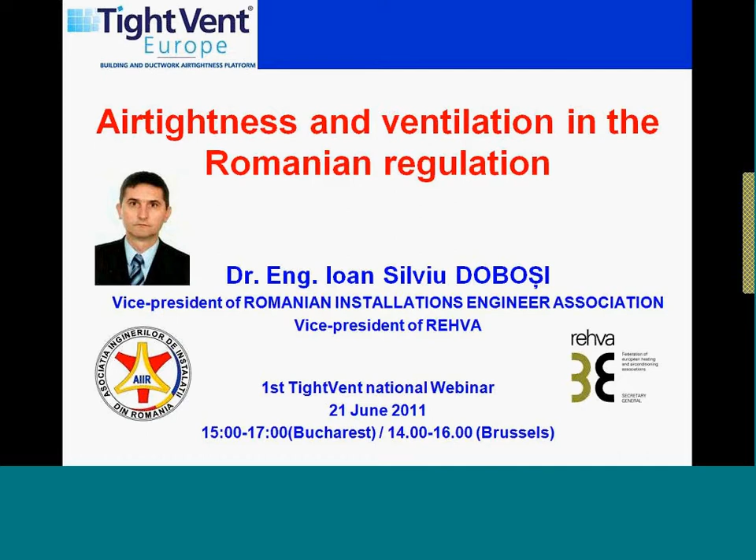Okay, let's go to our topics. My presentation is divided into 4 chapters. First, I want to introduce the European legislation and Romanian legislation, and some ideas which we have in the Romanian legislation and regulation regarding building tightness and ventilation tightness. After that, the step in which we are for the moment to attain the goal of nearly zero energy building in Romania.

The main European legislation which we have is the Energy Performance of Building Directive from 2002, and the recast EPBD from 2010, and of course the EN EPBD standards.

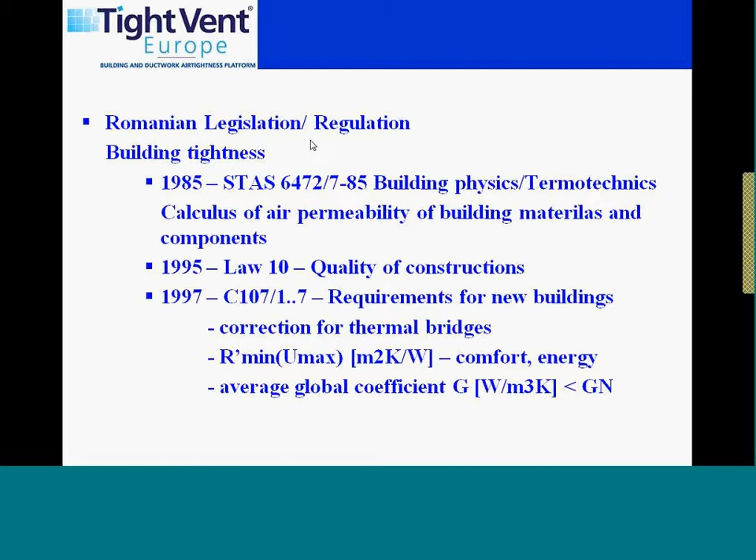Regarding Romanian legislation and regulation in building tightness, we have standard 6472 from 1985, building physics, thermotechnics, calculus of air permeability of building materials and components. Law number 10 from 1995, quality of construction. C107 from 1997, requirements for new buildings. In 2005, Law 372, EPBD transposition, and from 1st of January 2007 we have a new methodology.

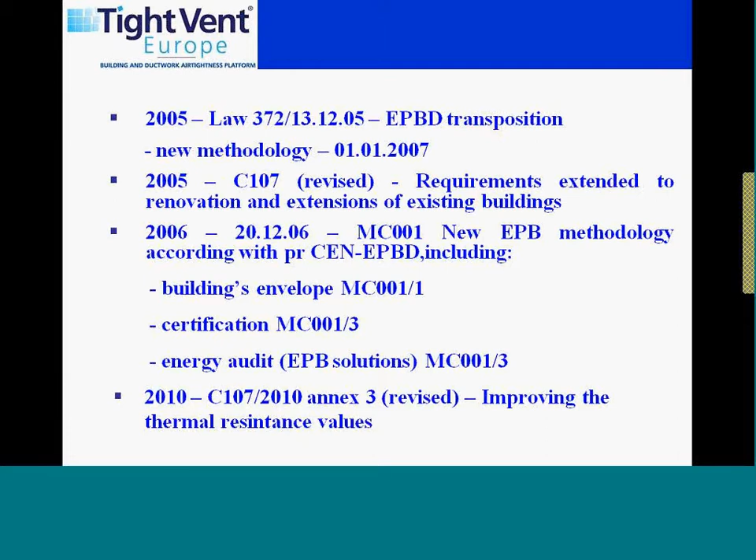The new EPBD methodology according with the EN EPBD standards, including the building envelope, the certification, and the energy audit. In 2010, the C107 was revised and it was improving the thermal resistance value.

Regarding the tightness of ventilation systems, the methodology is the new methodology according with the EN EPBD, including the building services, the MC001/2, certification and energy audit.

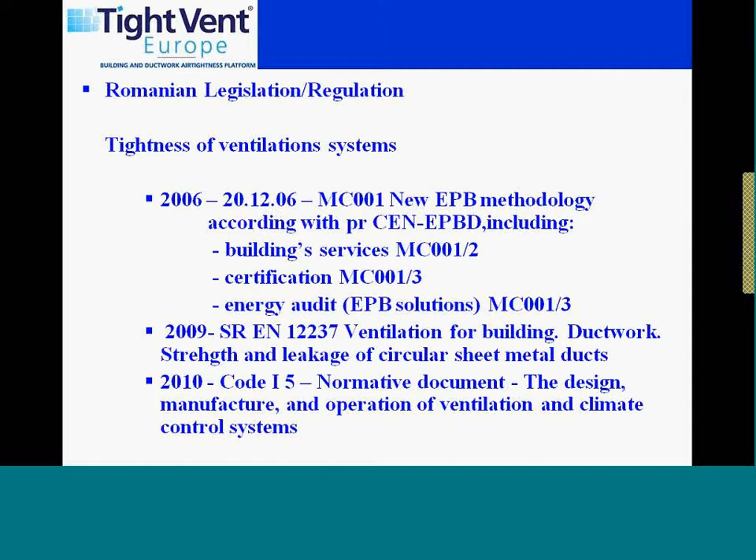In the European standards which became Romanian standards also, we have EN 12237 ventilation for buildings, ductwork strength and leakage of circular sheet metal ducts. From 2010, we have a new code in ventilation, code I5, a normative document titled the Design, Manufacture and Operation of Ventilation and Climate Control Systems.

Building tightness is mentioned in Article 4 of Law 372, the EPBD transposition, and in the methodology. There we find thermotechnical characteristics of the elements that make up the building envelope, interior partitions, and including airtightness.

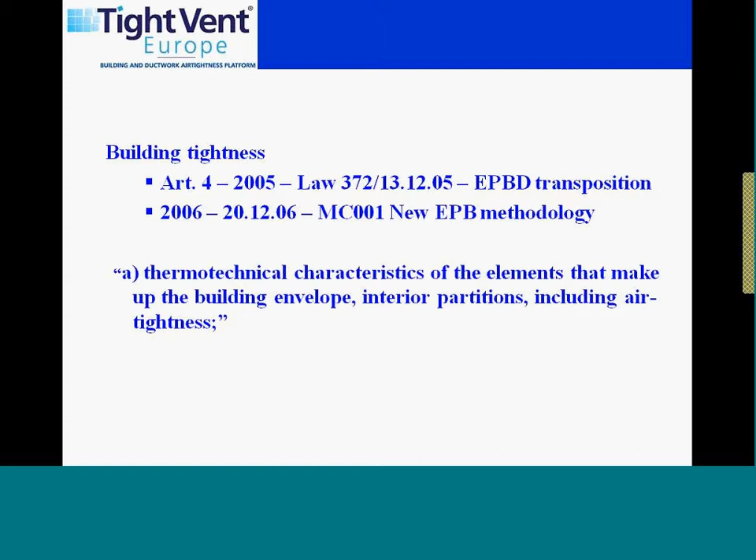The envelope and airflow: the flow of air through the envelope can be a source of heat loss. Because warm air can contain large amounts of water vapor, airflow is also the main means through which moisture passes through the building envelope. In winter conditions, air is forced to pass through the building envelope; air coming out carries heat and humidity, and incoming air which is dry creates uncomfortable currents.

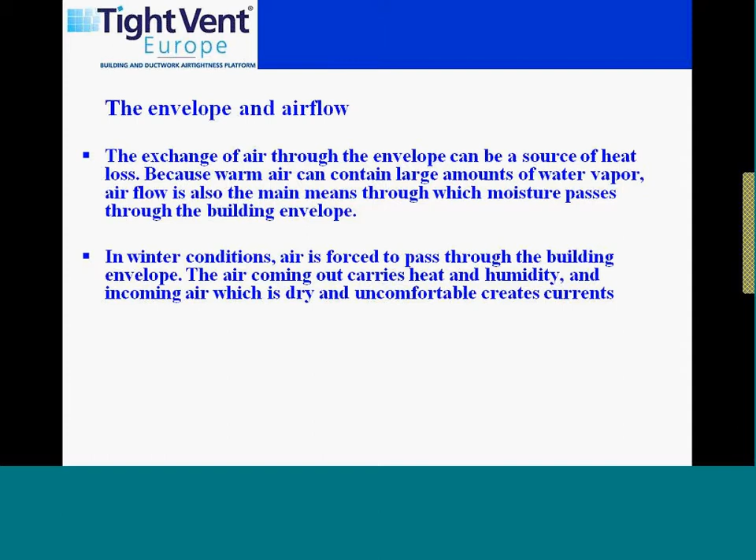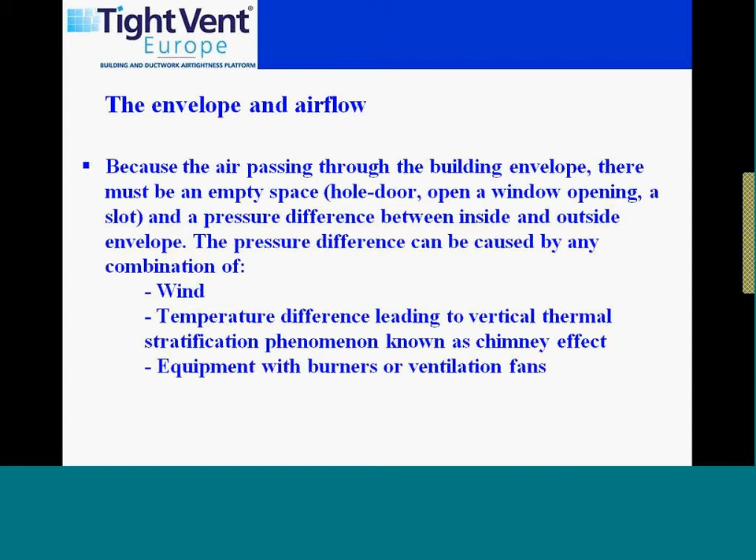Before passing through the building envelope, there must be a pressure difference between inside and outside. This pressure difference can be caused by a combination of wind, temperature difference leading to vertical thermal stratification known as the chimney effect, and equipment with burners and ventilation fans.

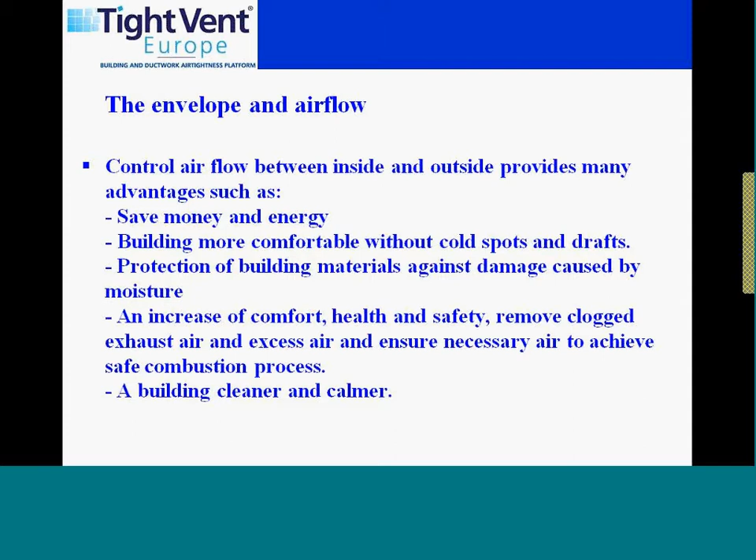Controlled airflow between inside and outside provides many advantages such as saving money and energy, making buildings more comfortable without cold spots and drafts, protecting building materials against damage caused by moisture, increasing comfort, health and safety, removing clogged exhaust air and excess air, ensuring necessary air to achieve a safe combustion process, and a cleaner, calmer building.

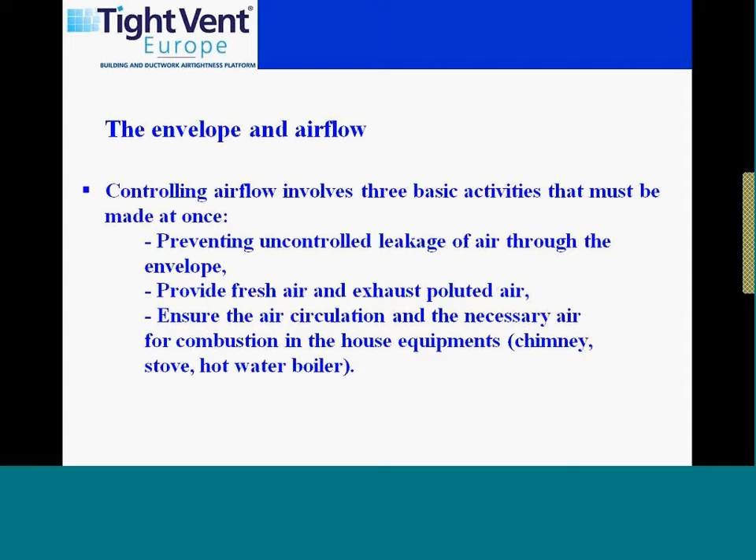Controlling airflow involves three basic activities that must be done at once: preventing uncontrolled leakage of air through the envelope, providing fresh air and exhausting polluted air, and ensuring air circulation and necessary air for combustion in the house equipment.

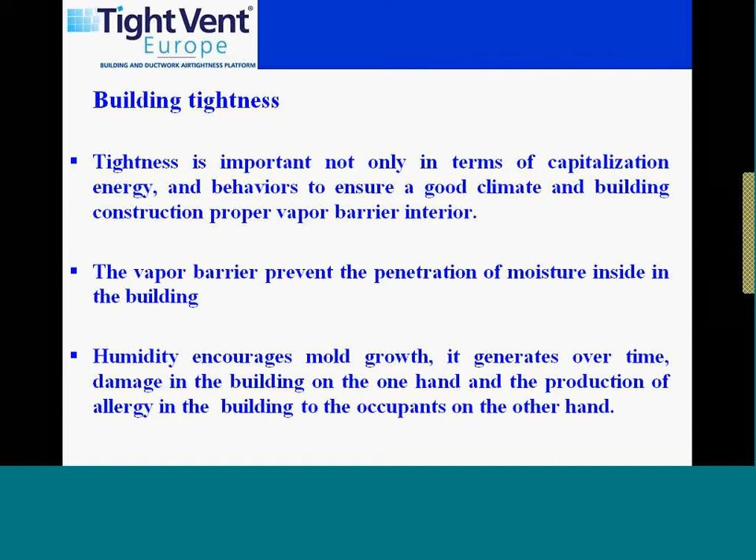Building tightness is important not only in terms of energy, but also to ensure a good climate and building construction with a proper interior vapor barrier. The barrier prevents the penetration of moisture inside the building. Humidity encourages mold growth, which generates damage in the building over time on one hand, and causes allergies for the occupants on the other hand.

What is important is to not forget that a completely tight building is unhealthy, even dangerous.

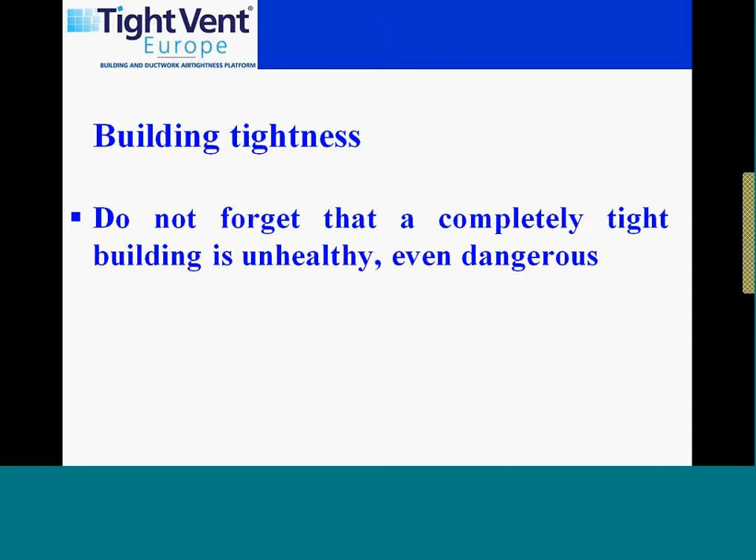Tightness ventilation systems, according with the normative document Code I-5, we have a table with the air tightness requirement for air pipes, which shows the maximum admissible for four classes of air tightness.

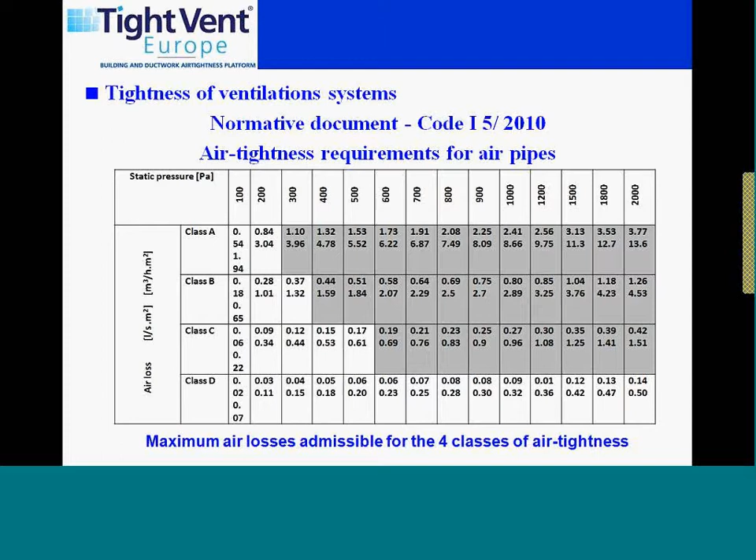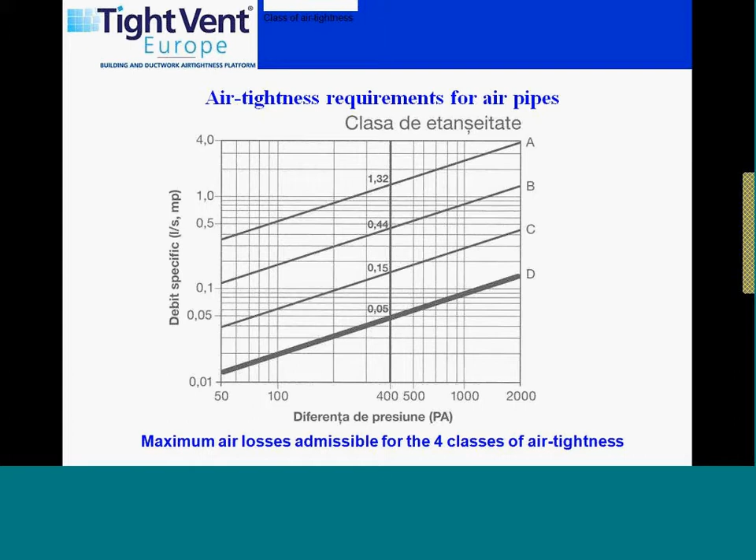The maximum air losses admissible for four classes of air tightness. We can see here the four classes mentioned before, which we have in our norms.

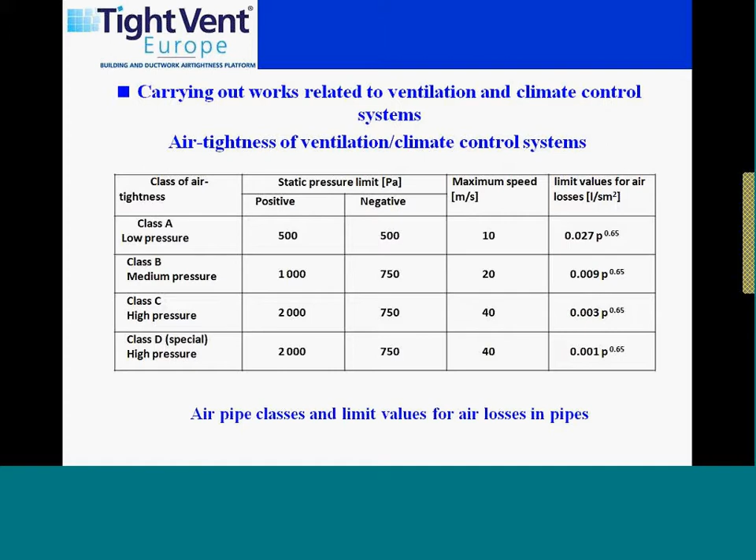Work related to the ventilation and climate control systems. We have a procedure to evaluate the air pipe class and limit value for air losses in the pipes, and this table shows how we can do that.

Steps will be taken to test the degree of airtightness of the air pipes. Air pipes belonging to Class A do not require testing. Parts belonging to Class B shall be tested within the limit of 10% of the parts within a network, chosen at random.

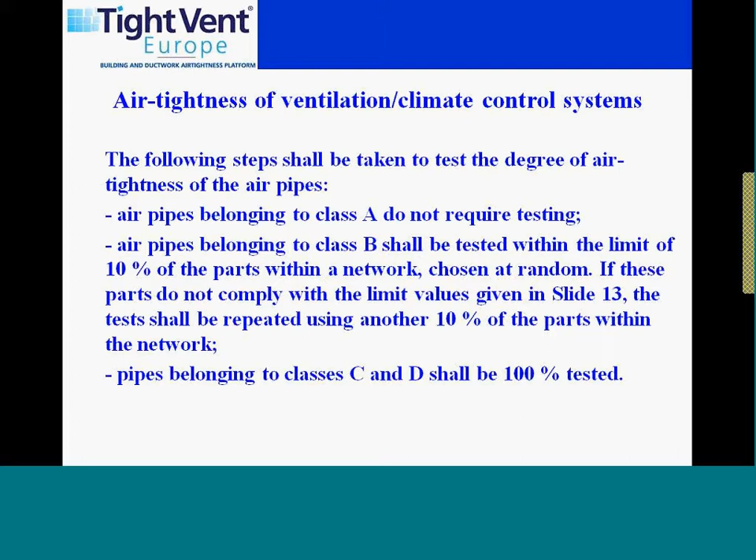If these parts do not comply with the limit value given in slide 13, the test shall be repeated using another 10% of the parts within the network. Pipes belonging to Class C and D shall be 100% tested.

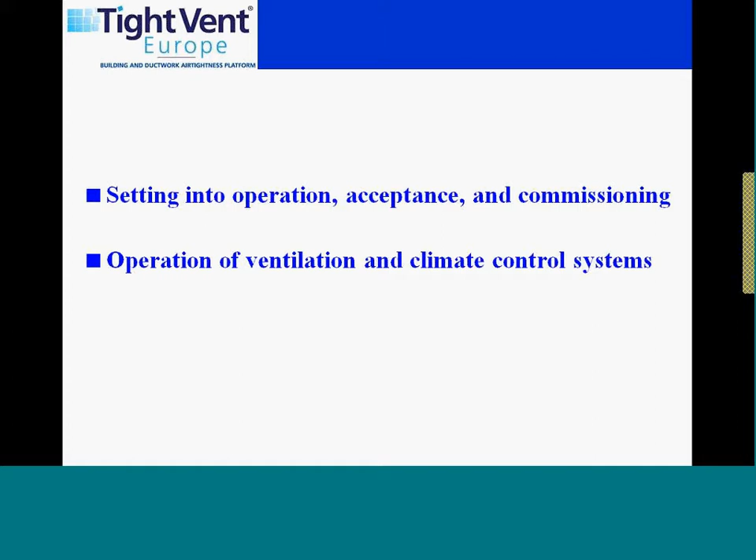Also, we should check the airtightness for the ventilation system in the setting into operation, accepting and commissioning, and in the operation of the ventilation and climate control system.

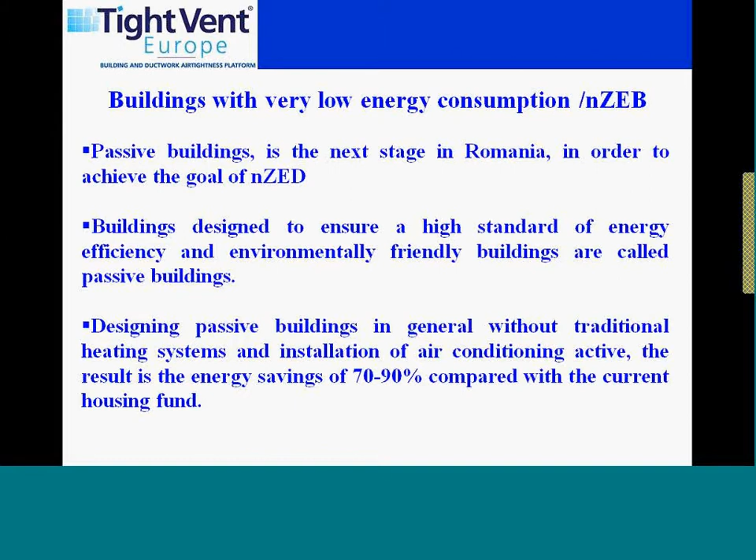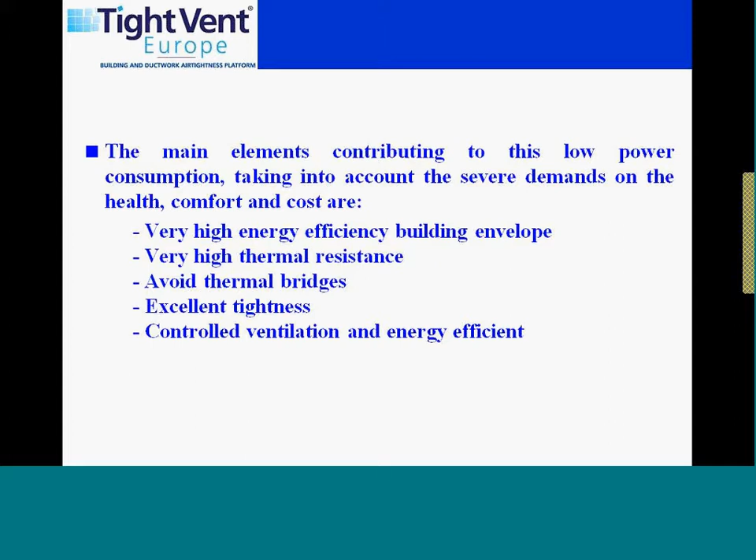The main elements contributing to the low power consumption, taking into account the severe demands of health, comfort, and cost, are very high energy efficiency building envelope, high thermal resistance, avoid thermal bridge, tightness, control ventilation, and energy efficiency.

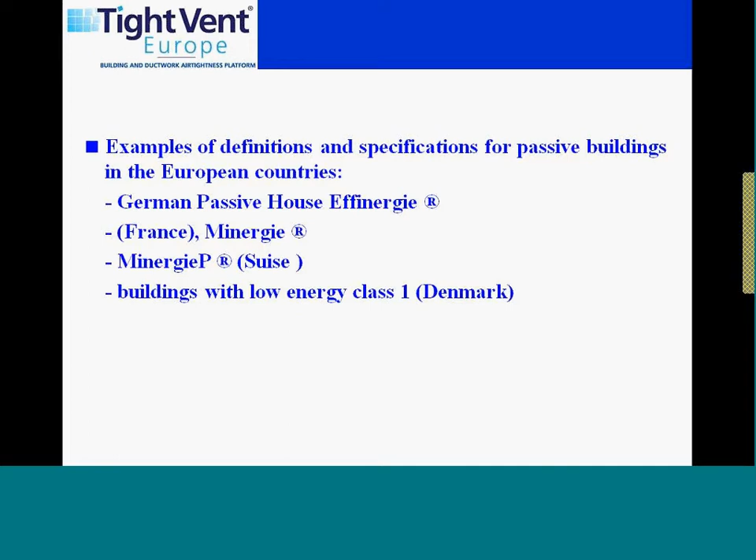Examples of definitions and specifications for passive buildings in European countries: German passive house, Effinergie in France, Minergie in Switzerland, buildings with low energy class 1 in Denmark.

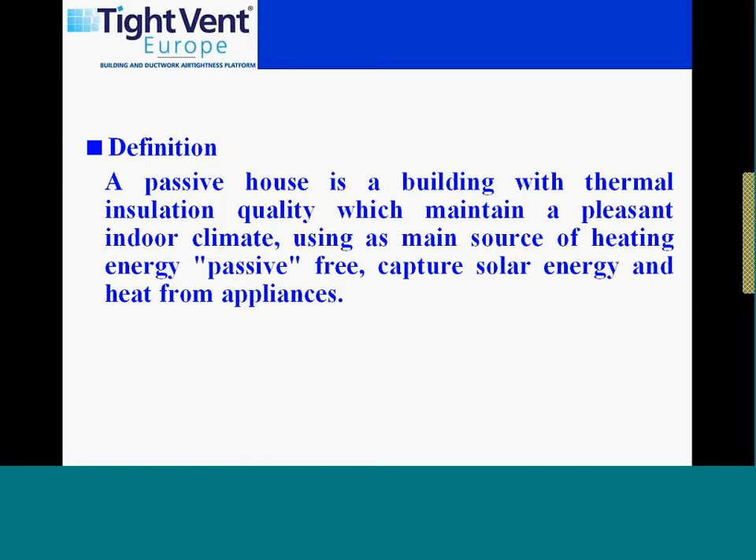A passive house is a building with thermal insulation quality which maintains a pleasant indoor climate using a main source of heating energy: passive free capture solar energy and heat from appliances.

The features of passive houses are quality insulation, triple glazed windows, low E, without thermal bridges, control ventilation with efficient heat recovery.

Selecting optimum building orientation for maximum solar energy capture and protection from prevailing winds, appliances with low power consumption, annual heat consumption up to 15 kWh per square meter, and total primary energy consumption limited to 120 kWh per square meter per year.